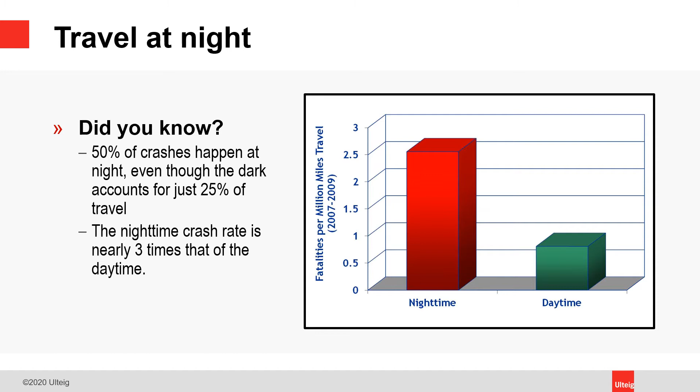Retroreflectivity is important because of the improvement in visibility at night. Although only 25% of travel takes place in dark conditions, 50% of the crashes take place in the dark. Improvements in retroreflectivity can contribute to increased safety for drivers. Retroreflectivity is the property of traffic signs that reflects light back to the driver. The higher the retroreflectivity of a sign, the easier it is for it to be seen from farther away.

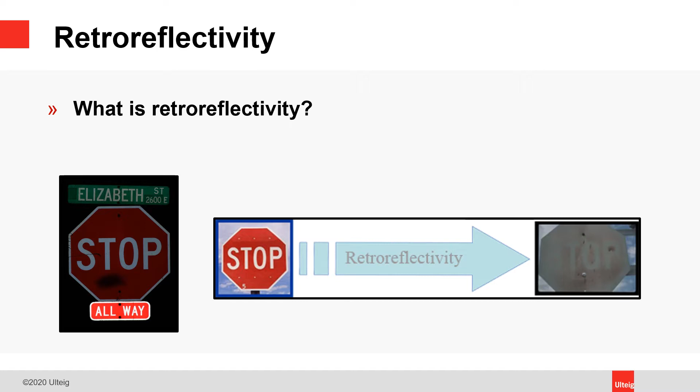As part of the South Dakota DOT sign replacement program, the signs are not just replaced with newer signs with improved retroreflectivity. The program mandates that we, the designers, also bring all the roads in the participating areas up to full compliance with the following manuals and standards. This is also a function of the requirement of the federal safety funding.

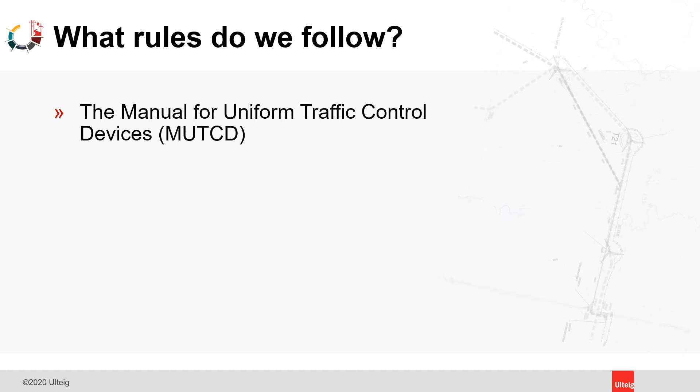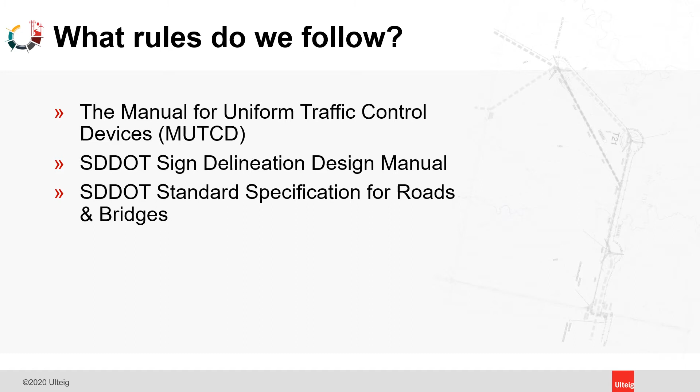For example, the following are a couple of the manuals and guidelines that we must follow when designing this project: the Manual for Uniform Traffic Control Devices, or MUTCD, the South Dakota DOT Sign Delineation Design Manual, the South Dakota DOT Standard Specifications for Roads and Bridges, the South Dakota DOT Road Design Manual, South Dakota DOT Local Roads Plan, and the South Dakota Codified Law.

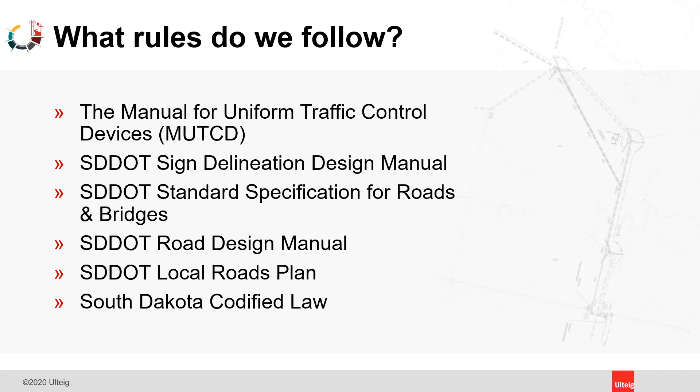So what is it that we do? We do not go out and try to put every sign possible on your roads. We know the funding challenges your organizations face. However, we are bound by the guidance in the previously mentioned manuals and specifications. There is some flexibility in the program to try to fit in with your township, towns, and counties, but we cannot violate these standards. Here are some examples of some of the things that we will be evaluating and adding to your township, town, or county road.

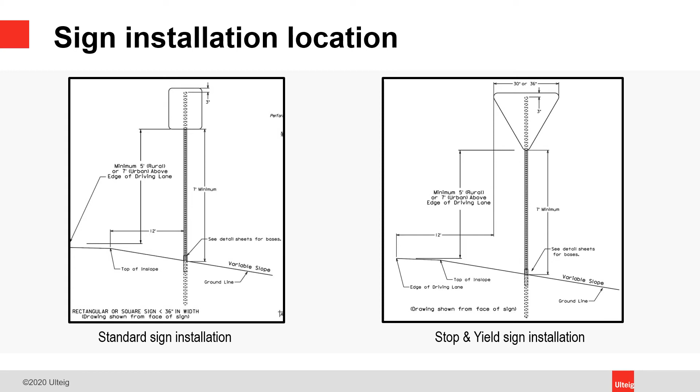New street signs will be installed 12 feet from the edge of the road with the sign 5 feet above the edge. In towns where there is curb and gutter, the sign will be installed 2 feet behind the face of curb and 7 feet above the top of curb.

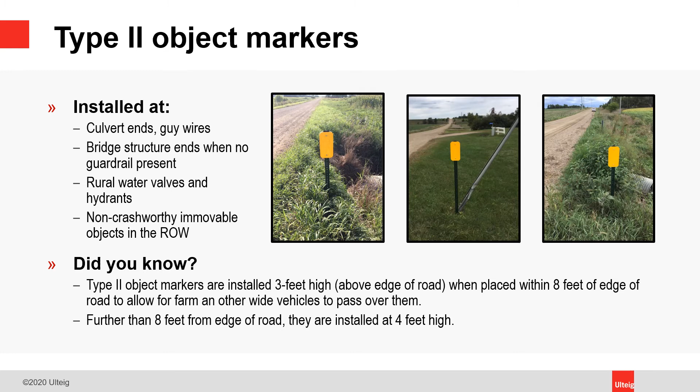Type 2 object markers are installed by hazards in the right-of-way. Items like culverts and guy wires, rural water valves, and hydrants are all examples of things we would put an object marker by. When object markers are close to the roadway, we install them lower than we do in the ditch, so they do not get in the way of farm equipment.

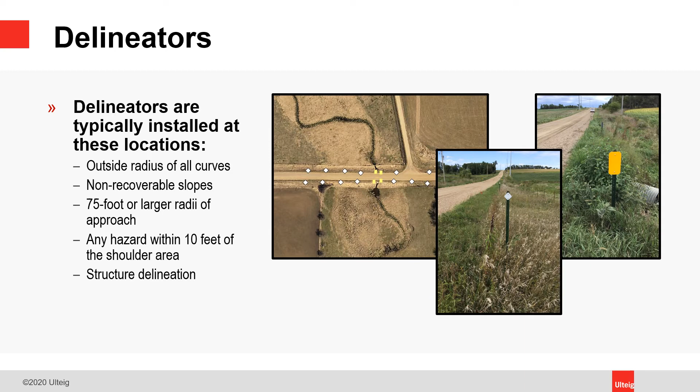Delineators include double-sided white diamonds on posts or round reflective markers. They are used on the outsides of curves, hazards close to the edge of the road, structures, or large radii at intersections. Structure delineation is the type of delineation you will not see often on the roads. This type of delineation is only installed on DOT numbered bridges without guardrail. When guardrail is present, those locations get a different type of white marker.

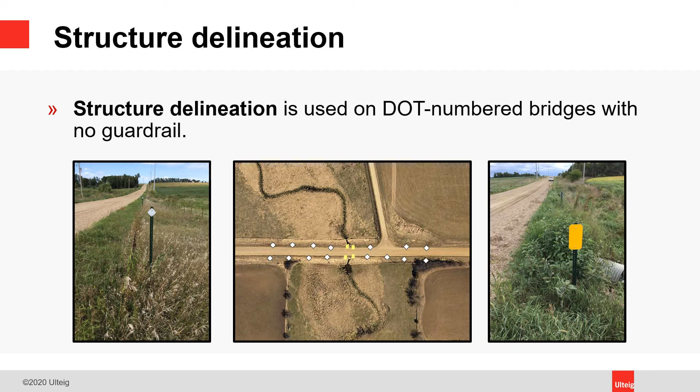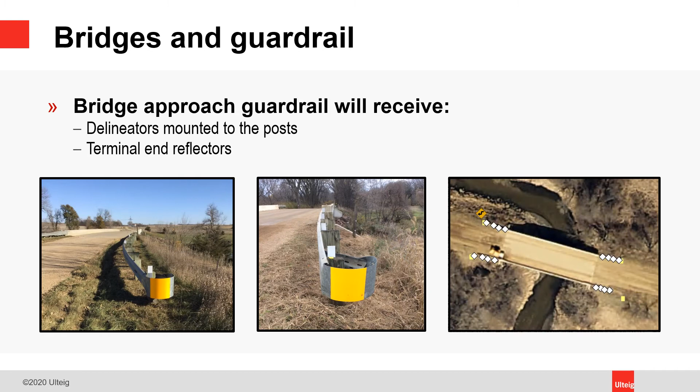Like with object markers, delineators that are close to the roadway will be installed lower than they would further down in the ditch, so they don't get in the way of wide farm equipment. As mentioned before, bridges with guardrail will have another type of delineator installed on them to make them more visible. They will also get reflectorized end markers installed at the ends of the guardrail.

When guardrail is not present at the bridge structures, either Type 2 or Type 3 object markers will be installed. If the bridge is narrower than the roadway, then Type 3 markers will be installed. If the bridge is the same width or wider than the roadway, then Type 2 markers will be used. Since these are close to the roadway, the Type 2 object markers will be installed shorter, like previously mentioned. The Type 3 markers will remain tall, but they are on flexible mounts that allow for the object markers to be folded down when necessary.

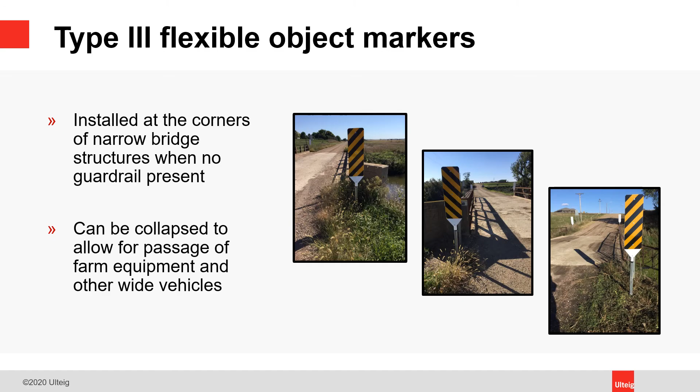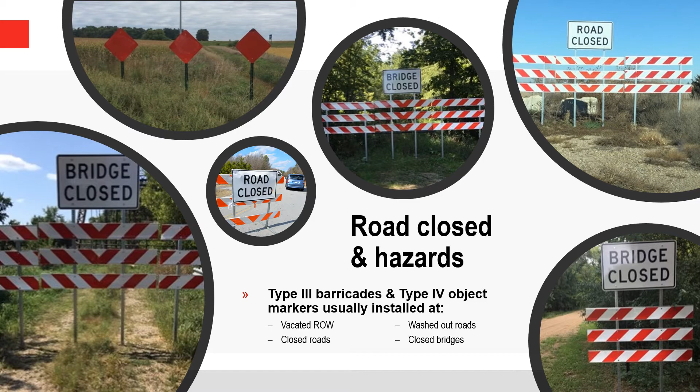Type 4 object markers are the red diamond signs. They are typically installed in sets of 3 and they indicate the end of a roadway. When there is a more substantial or more dangerous hazard ahead, Type 3 barricades are installed the full width of the roadway to ensure vehicles cannot continue. These are typically used with washed out roads or bridges that are closed.

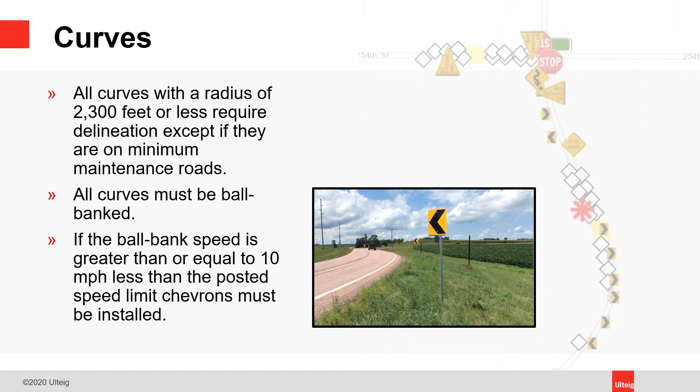One of the places where you're likely to see big change is around the curves and turns. All curves and turns on county and township roads will be ball banked. Ball banking is a technique where the safe speed to negotiate a turn can be determined. These ball bank speeds, in conjunction with the radius of the curve, are what determine what kinds of signs and delineators are needed. Township roads will likely see the biggest change when it comes to curves and turns.

Street name signs throughout the county will be replaced as part of this project. The size of the signs will increase to improve visibility. They will be 12 inches tall in the county and 9 inches tall in the towns, and will consist of 2 signs mounted back to back. Installation locations of these signs will vary depending upon the right-of-way that they are in. The county, township, and towns will be coordinated with to ensure proper spelling and that suffixes and abbreviations are correct. All spellings will be checked with the local agency for accuracy.

One of the last changes you are likely to notice has to do with the signage in uncontrolled intersections that have seasonal sight obstructions. Tall corn in the fields in the fall is an example of a seasonal sight obstruction. South Dakota codified law states that when a driver's view is obstructed at an intersection, the maximum lawful speed is to be 15 miles per hour. This would mean that if there is an agricultural crop in even one corner of an intersection, then a year-round speed limit for that intersection shall be 15 miles per hour and should be signed as such.

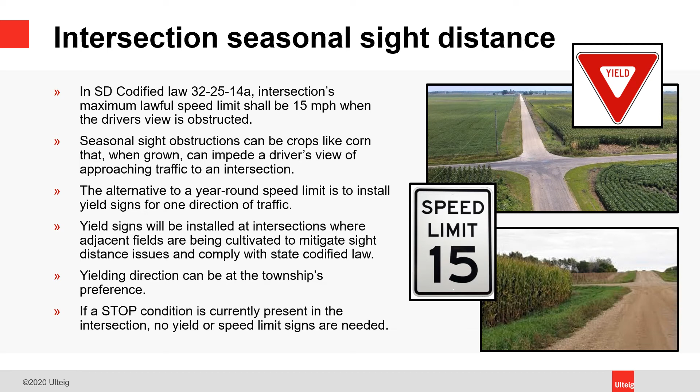However, the preferred alternative in these situations is to install a set of yield signs. The yield direction will be at the discretion of the township. This eliminates the need for multiple year-round speed limit signs at each intersection with adjacent cultivation. This will not need to be done if there's already stop signs at an intersection or if there's a permanent sight obstruction that would require a set of new stop signs. Per federal highway guidelines, non-standard signs cannot be reinstalled as a part of the sign replacement program.

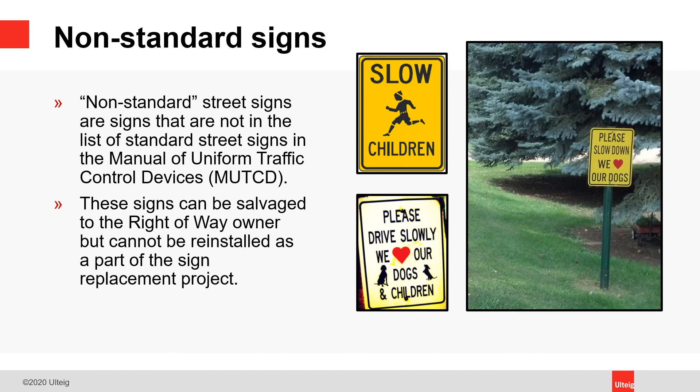Now, on to what we need from you. We have provided you with a packet of information that includes a map of your township or town for you to mark up with the following items, such as speed zones, minimum and no maintenance roads, vacated and closed roadways, school zones and bus stops, truck routes, and for the townships, any maintenance agreements with adjacent townships. This information is essential to us doing our job right. No one knows your roads better than you.

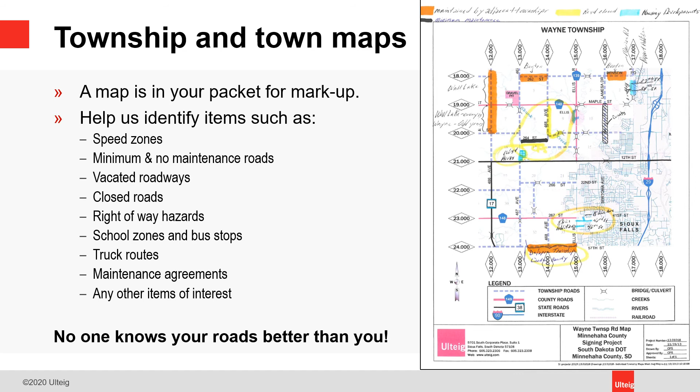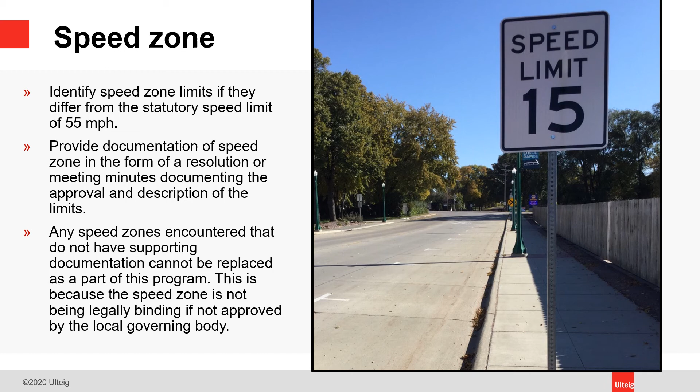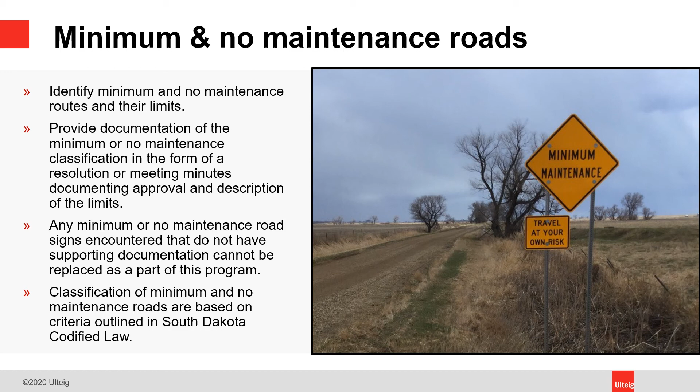When marking speed zones on the map, please be clear where the beginning and end points are. Since speed zone signs are regulatory, backup documentation such as city ordinances or township resolutions need to be supplied or any existing speed limit signs will be removed and not replaced. Minimum and no maintenance roads should be identified on the maps. These too need to have backup documentation consisting of township resolutions. Without the township resolutions, any existing no and minimum maintenance signs will be removed and not replaced.

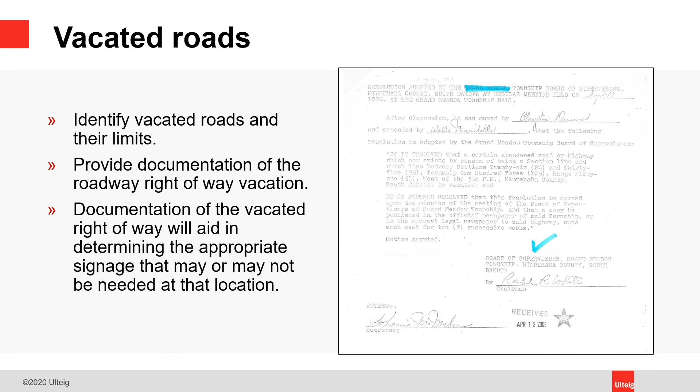Unlike minimum and no maintenance roads, vacated roads are no longer right-of-way and are not signed. However, we do need documentation of the vacation of the right-of-way. Roadway vacations are commonly recorded with the county. Closed roads will also require resolutions from the township stating that the road is closed and what the limits of that closure are.

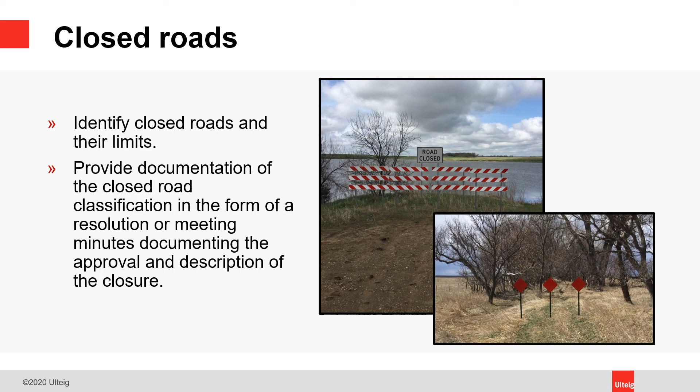In towns, existing safe routes to school and any crossings that are not already marked with school zone signage should be noted in the maps. If there are any old, unneeded school bus stop warning signs, those should be marked for removal. If there are any new locations, those should also be indicated on the maps. Neither of these require any backup documentation to be provided. In towns, identify on the map which roads are truck routes and any streets where the trucks are not allowed.

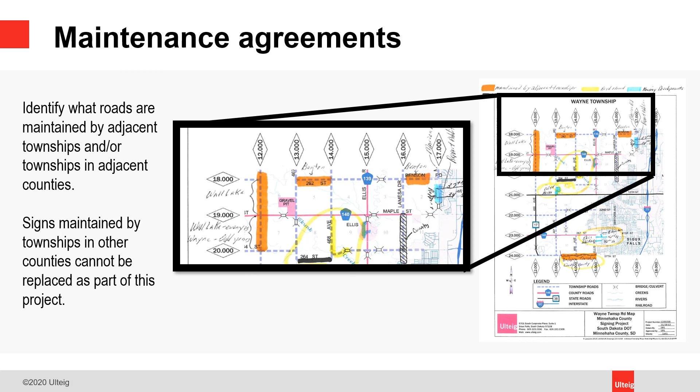The border road maintenance agreements are important to identify, so when we do our design, we know who has decision authority for the signs on those roads. It's also very important to know these agreements if your township is a county border township. This project has no authority over the signs in other counties. We do not require any additional backup information, but we will be cross-checking with adjacent townships, and if any discrepancies are found, we will contact both townships for clarification.